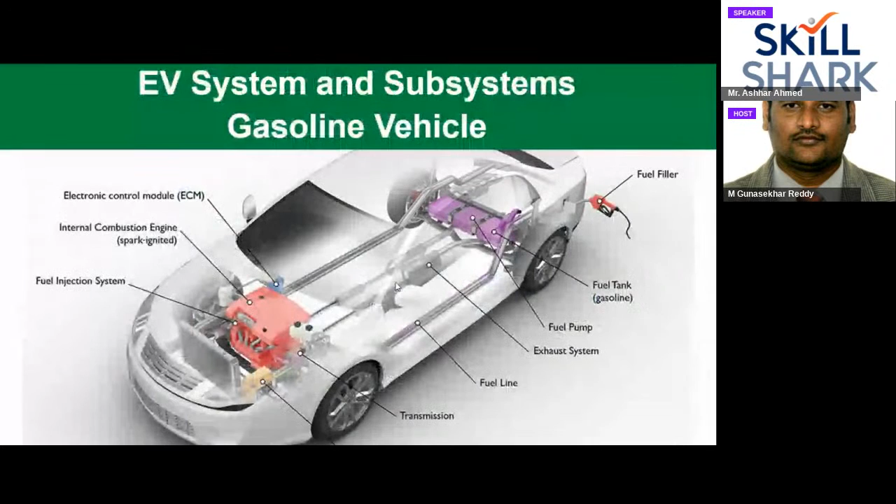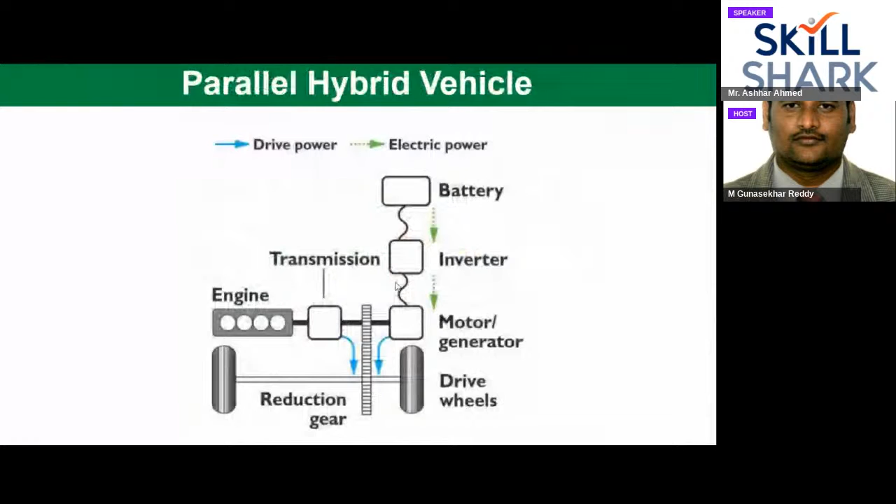Then we saw the need of fostering education and employability. We saw the automotive industry before and with COVID. What are the challenges? What does the Indian automobile industry need for electric vehicles? Transportation system overview we saw, then roadmap, classification, evolution, investments, requirement for the renewable energy sector. Then we saw the need of the EV ecosystem, different types from gasoline to hybrid, plug-in hybrid, electric vehicle, fuel cell vehicle. Then we saw the emissions from different modes, series hybrid, parallel hybrid, hybridization levels,

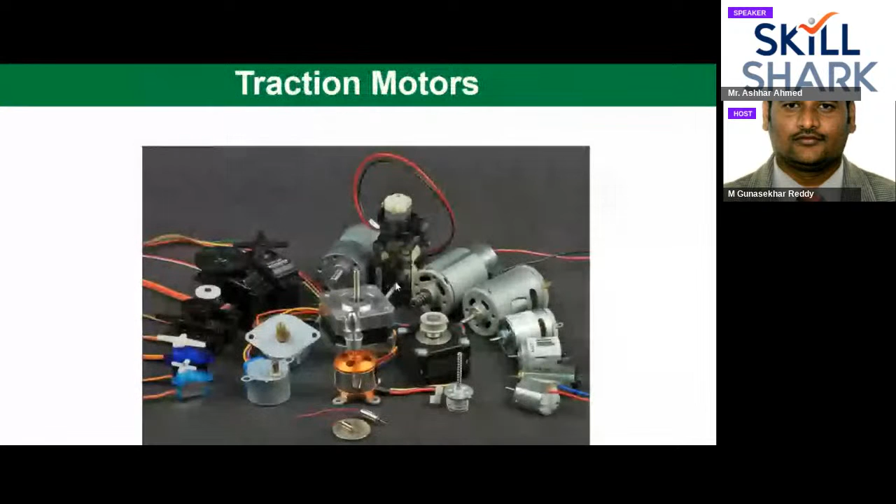EV systems, subsystems, weight distribution classification, comparison of EVs, e-mobility in India, then future of mobility in India, National Electric Mobility Mission Plan, electrification approach, global EV market, Indian EV market, driving factors, different products of the Indian mobility and EV industry. Then we saw the different propositions that will be emerging in coming time. Then we saw motor, battery, controller, the types of motors, and the characteristics of motors. Then we saw a few case studies of different types of motors. Then what else we saw?

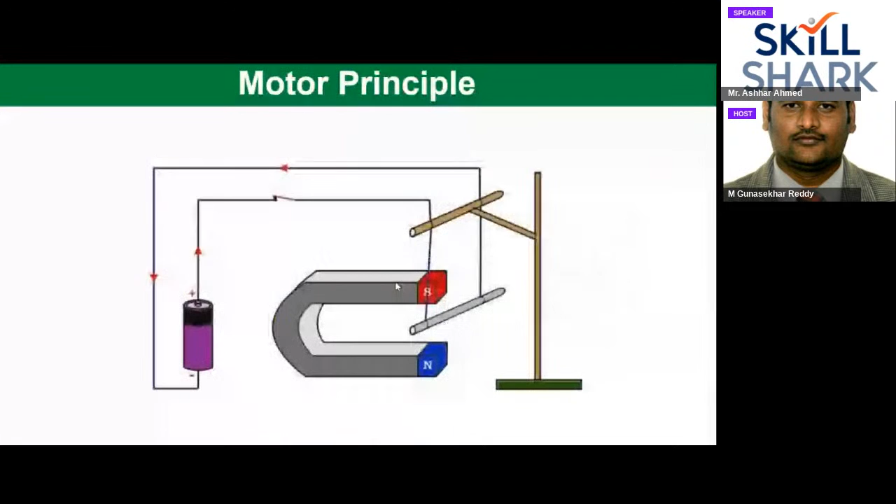We saw the motor principle, how a motor actually functions. Then we saw the different types of motors. So we stopped till this point. So let's try to resume from here. Yesterday we were discussing one part. I hope everyone is clear till now. If you have any doubt or clarification, you can post your query in the chat box. So yesterday we were discussing how a motor can act as a generator.

How a motor can act as a generator. And I told you that in today's session I will show you a video where you can actually understand how a motor can act as a generator. So there are two things that we have to understand. Motor construction and generator construction are similar because both work with the magnetism concept. In a motor there is a stator, there is a rotor, and in a generator also there is an armature.

So in a motor or generator, what we are trying to do is the interaction between the stator and rotor magnetic fields, and because of that interaction, the rotor is moving and we are getting a torque or output. So what is RMF? Rotating magnetic field that is getting created. If the RMF speed is greater than our rotor speed, then the setup will act as a motor.

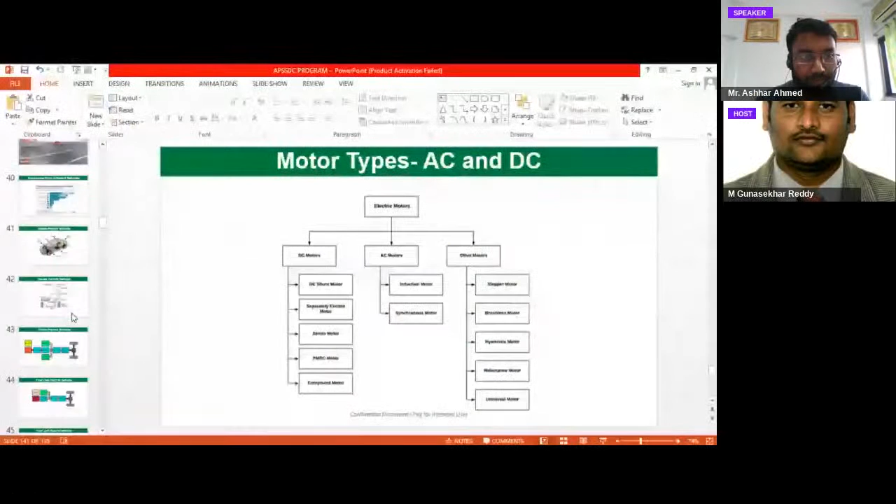It, yes. So here you can understand how the regenerative braking is happening, and how the motor will act as a generator.

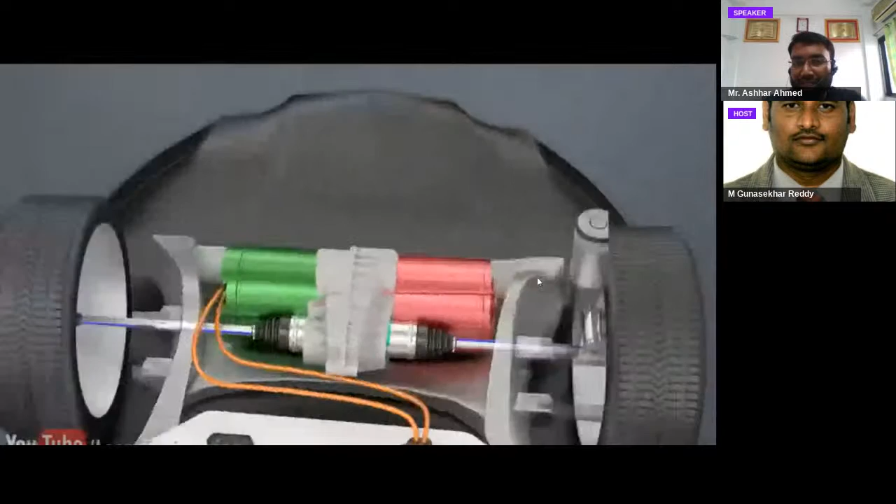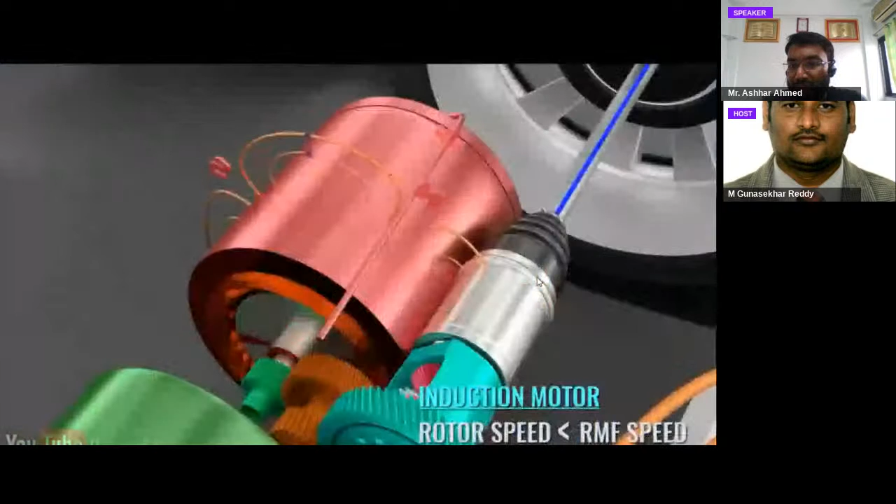How can a motor act as a generator? You see, there are two concepts. One is RMF speed, another is the rotor speed. So the setup will act as a motor if RMF speed is greater than the rotor speed, and it will act as a generator if the rotor speed is greater than the RMF speed. I hope through this video you will be very clear with the concept, right?

All right. So this was about the rotor speed and the RMF speed and how a motor can act as a generator. Right now, let's try to understand the further things that we have to discuss today. Right. So about the types of motors. So when we say a motor or a traction motor that we are going to use for our electric vehicle, we have to actually understand what are the different types of motors.

So hope you are able to see my screen. Yeah. So electric motors are majorly categorized into three types: DC motors, AC motors, and other motors. So in DC motors, there are different types: DC shunt motor, separately excited motor, series motor, PMDC motor, compound motor. These are the different types of DC motors.

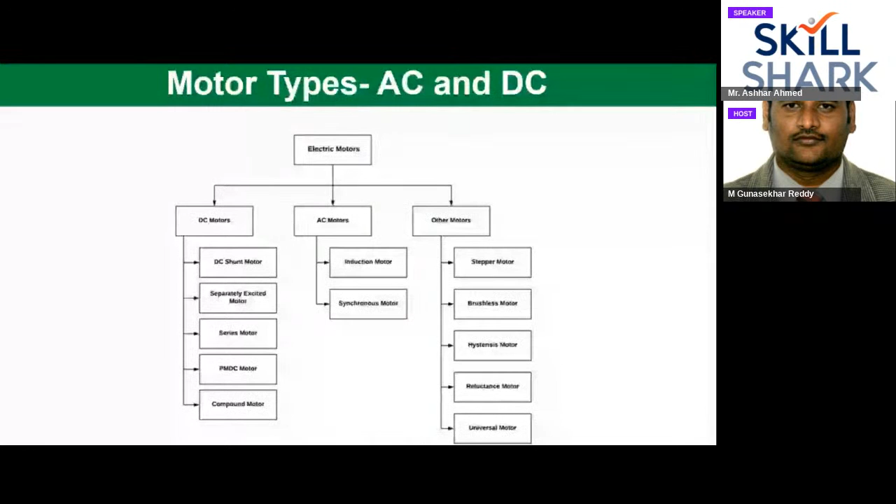Right. So in DC motor, what is the difference between this DC shunt motor, separately excited motor, series motor, compound motor? In these different types of DC motor, the difference between the shunt motor, series motor, compound motor, is the position or configuration of the field and armature. So let's try to see that. Right here you see the field is connected in series. Here it is in a shunt position. Here it is in a compound position. Are you able to understand? I hope you are able to understand.

Yes. So these are the different configurations. Shunt is nothing but parallel. Series is series. Compound is a combination of both series and parallel. When we say that the resistor is shunted, it means the resistor is connected in a parallel configuration. So I hope everyone is aware about series and parallel. In coming slides, when we are discussing about battery, we are actually going to see the difference between connecting the cells in series and connecting the cells in parallel.

All right. So let's try to see specifically about the motors. So these are the different types of DC motors majorly used in our electric vehicles.

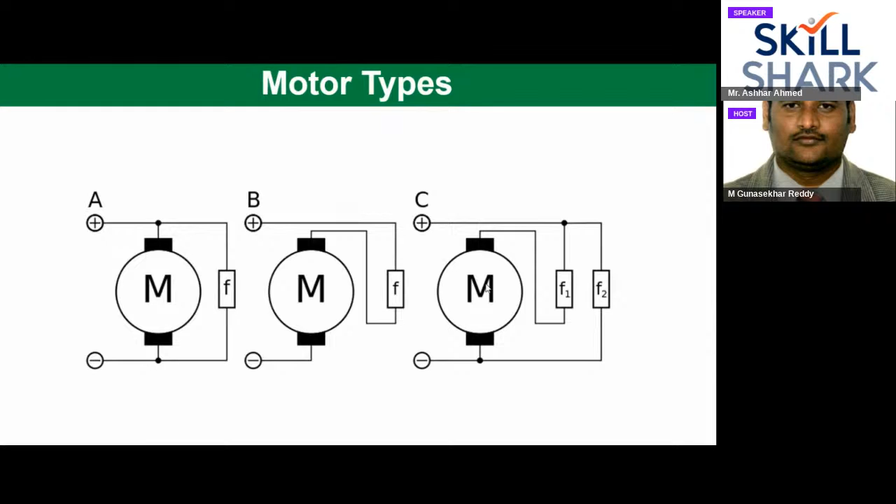And Shankar Narayan is asking what is that F1 F2. So F1 F2 is nothing but field. You see, this is armature and field. We represent the armature, or the rotor, with that M. Are you able to understand? So these are the notations we give for armature, and this F is the field. So here the field we are connecting in series as well as parallel. That is the F1 F2 you are able to see. Yeah, field winding, correct, the field winding.

So now let's try to understand the different types of DC motor majorly used in our electric vehicles. In our electric vehicle, we can see the brush DC motor, the PM DC motor, permanent magnet DC motor, and the brushless DC motor. So can you tell me what is the difference between these types of motors?

So can anyone explain? You can use your mic, or else you can comment in the chat box. You are free to respond. So can you tell me what is the difference you are able to see between the brush DC motor, permanent magnet DC motor, and brushless DC motor?

Yes. All right, so let's try to understand the difference. Right here, in brush DC motor, right, you see the construction wise.

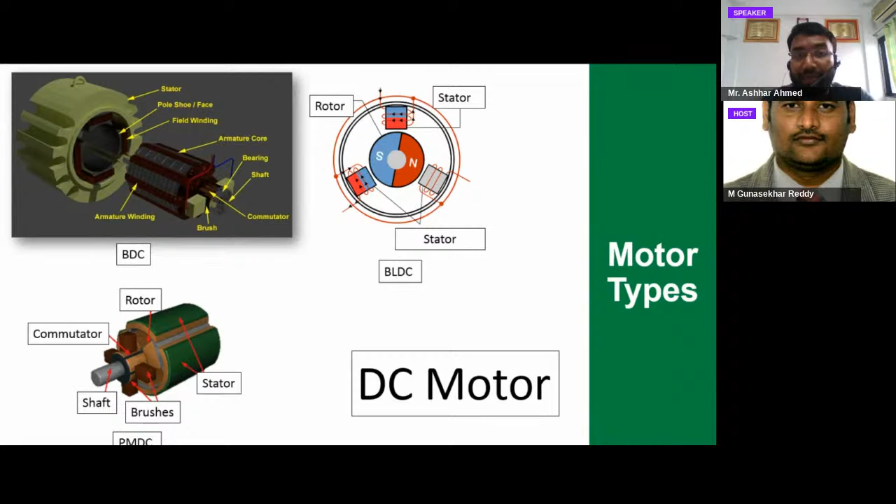Let me tell you. So the difference you are able to see between the brush DC motor and brushless DC motor is: in the brush DC motor, in the image on the screen, the stator is an electromagnet, and the rotor is an electromagnet.

Whereas in the brushless DC motor, the stator is an electromagnet and the rotor is a permanent magnet. Why do we pass electric current through the rotor here?

Why do we pass electric current through this armature winding or rotor here? We pass electric current through this armature winding or rotor to make it an electromagnet, so that it creates the magnetic field. So the whole reason to have the brushes is to flow the current through the armature winding.

But understand, when we replace this armature winding with a permanent magnet itself, you see here the rotor is a permanent magnet. Instead of this armature winding and these brushes, everything, we are replacing that with a permanent magnet. So there is no need of a brush here, no need of passing electric current to the rotor, because the rotor is already a permanent magnet.

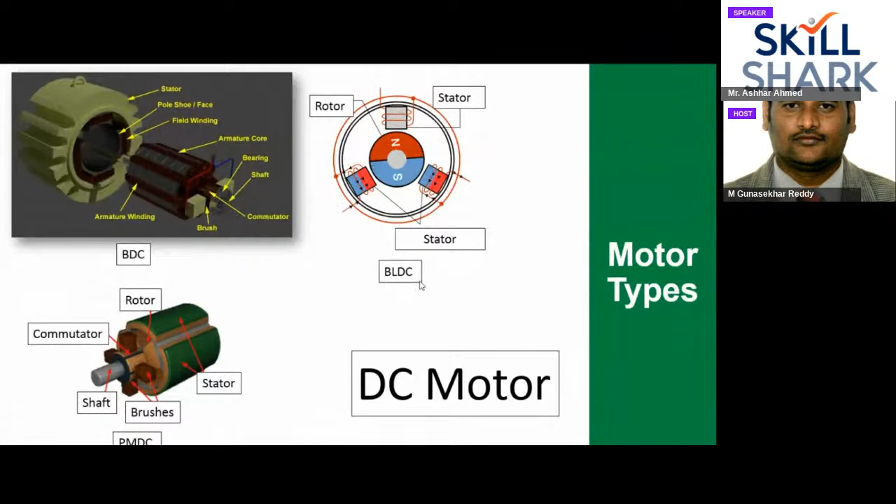So let's move to the next part. These are the different types of DC motors we saw. Now let's try to understand what are the different types of AC motors we can see in electric vehicles. We can see mainly three-phase AC induction motors getting implemented in most electric vehicles.

So the reason why people are switching towards AC motors, or the reason why people prefer AC motors—can you tell me what is the reason why people try to prefer AC motors?

So what happens actually in a DC motor? In an electric vehicle, whether we are using an AC motor or DC motor, our objective is to control speed, to provide the power, to provide the torque, to provide the rpm. So rpm or speed is one of the intentions why we are utilizing these motors.

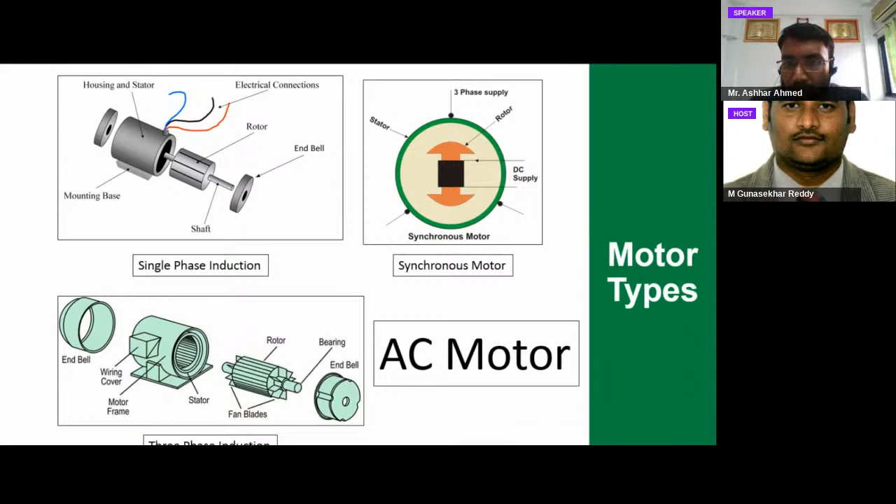Capacitor, does it allow AC or DC? Okay, people are telling that it allows AC. Yes, why does it allow AC only?

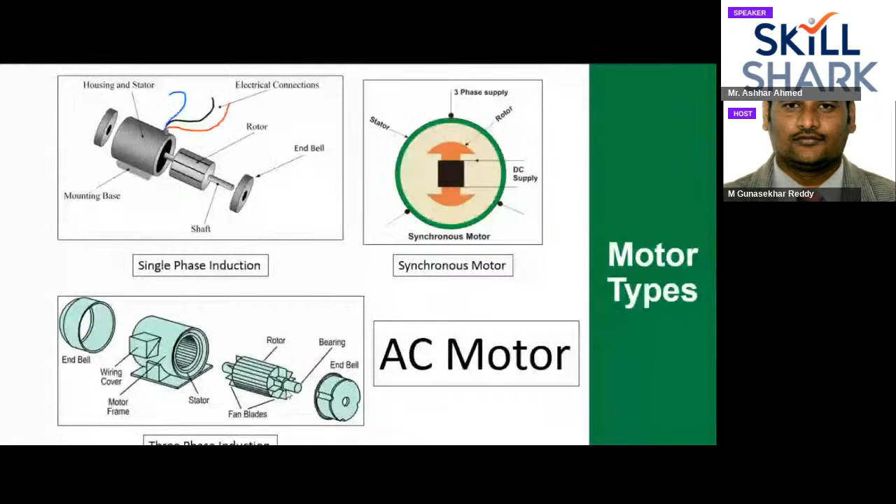I will tell you one story. I asked this question to a few people: tell me whether capacitor allows AC or DC. So he thought for a while and told me, okay, capacitor allows AC. I asked, can you explain with some mathematical explanation, or give an equation, to understand why capacitor allows AC and blocks DC?

So he told me he needed to recall. He said his faculty, in his class, was teaching electrical engineering and gave some explanation like that. So I told him, okay fine, you can think for a while and tell us what the explanation is.

Now the explanation that student gave is, he told me that in DC, the power supply or the flow will be constant. There will not be any variation, any variation of the voltage with time. So it will be constant.

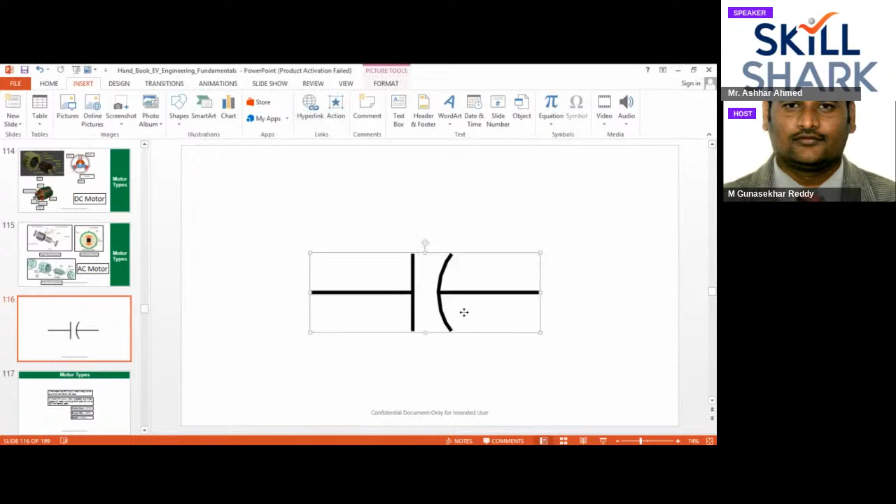So you should not be in the same position saying that capacitor, it allows AC because it can pass through like this. DC cannot pass, right? Because being an engineer, we should actually understand why capacitor, it allows AC and it blocks DC. So everyone is aware about XC. XC is nothing but 1 upon 2 pi FC, right? The capacitive reactance is XC equal to 1 upon 2 pi FC.

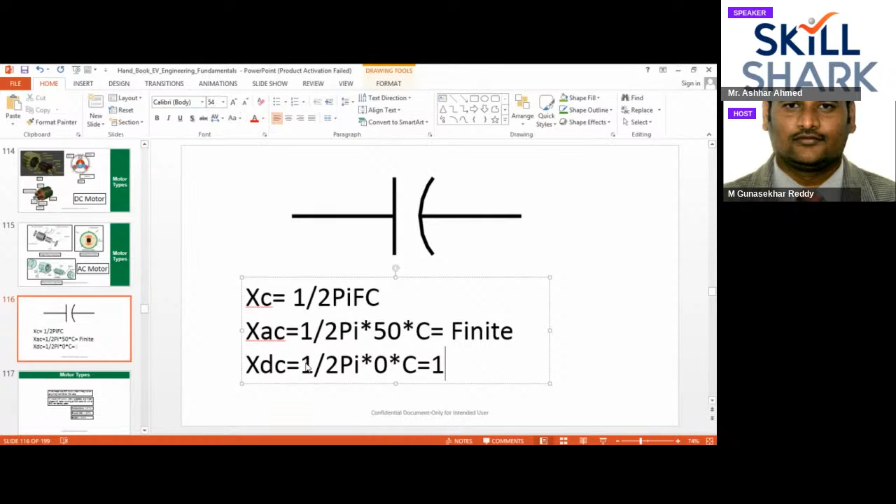And we know that for AC, the frequency is, let's suppose, 50 hertz. So here the frequency will be 50 hertz into C. So the reactance value for AC supply or AC input will be a finite value. Whereas X DC will be 1 upon 2 pi into 0 into C, which is equal to 1 upon 0, which is infinite. Are you able to understand? Yes. So this is a mathematical understanding of why capacitor, it allows AC and it blocks DC.

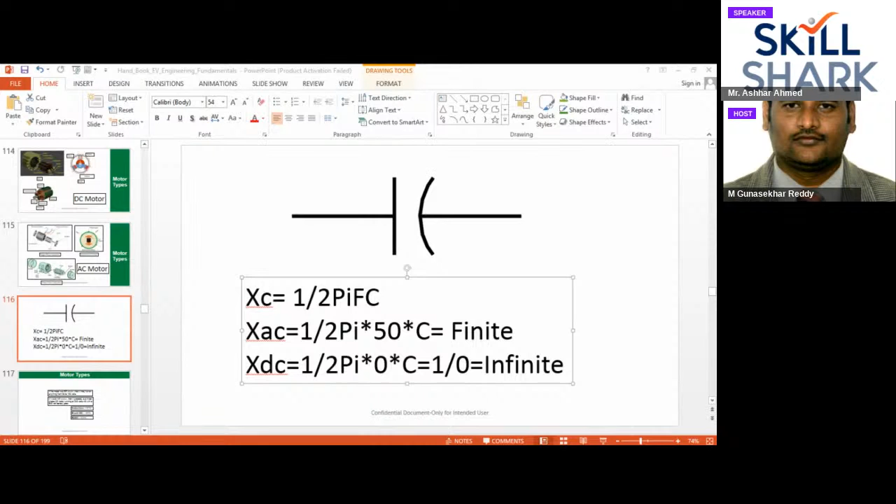When the resistance is infinite, how it will go? It cannot go. It will not go, right? So yeah, that is what I'm trying to communicate. So it is our responsibility to understand things, to learn things, and to apply things also, right? So now we can see in electric cars, in electric vehicles,

both DC motors as well as AC motors are being used. So there is efficiency of these different types of motor. Through induction motor, people are able to extract efficiency up to 91%. For brushed DC motor, they are able to extract efficiency up to 80%. For BLDC motor, up to 93%, right?

And if we are using any DC motor in our electric car, please take a note, I am talking about electric car, we are using any motor between 96 volt to 192 volt. And if we are going to use any AC motor for our electric car, then we are choosing the voltage system between 240 volt to 300 volt, right? So this is about the different types of motors.

Now we are going to start our discussion about selection of our motor. What is the procedure to select a particular motor? What are the calculations involved in it? And what are the things we need to actually consider?

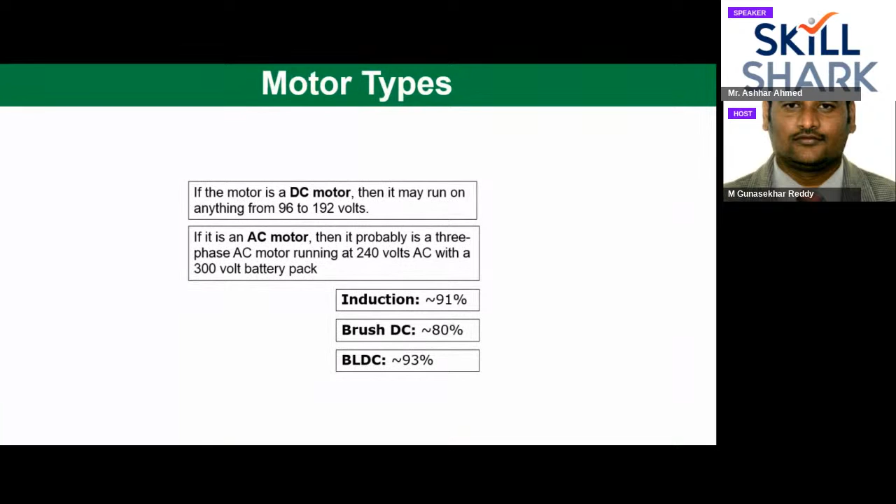And just for confirmation, I'm asking. I hope everyone is clear till now. Any doubt, anything? Please do comment. Please stop me and let me know if you need any clarification. Yes. Now let's try to see the motor selection part. Everyone is clear?

Yeah. Now let's try to understand the motor selection part. So motor selection is very, very important. How are we going to select the motor? For selecting the motor, the first thing that we need to consider is application. Based on the application, we are going to select these 6 parameters. What are they? Motor type, motor power, motor voltage, motor cost, motor size, and motor performance, right?

So how to understand what is the application? Application we have to understand by exploring where we are actually going to use that thing. Let's suppose, take an example of electric bicycle. So I have to use my electric bicycle. For what purpose? I'm going to use my electric bicycle for my personal commute from my office to my home and from my home to office. That is what my application is.

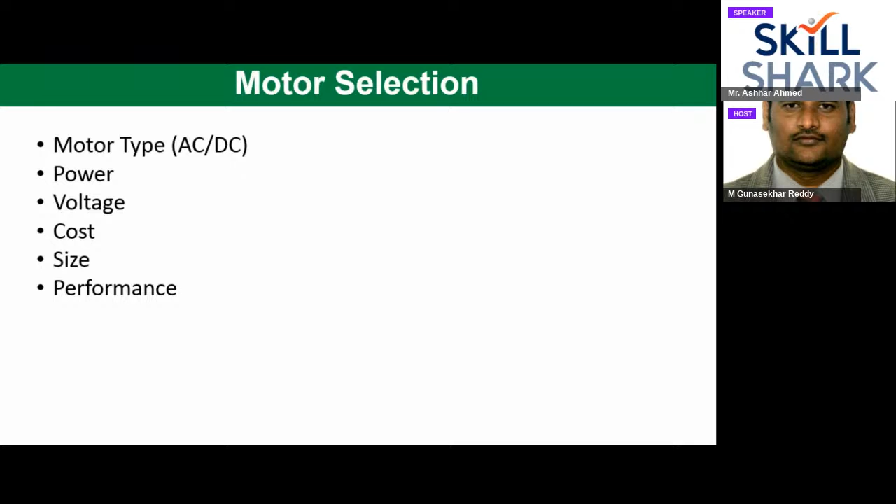So we are going to use this letter or this terminology for mass. Here mass will be the total mass of the vehicle, inclusive of driver, load, chassis, powertrain, other components, all these things. Let's take one example. For an electric bicycle, can you tell me what will be the weight of the bicycle, like frame, motor, controller, battery, everything?

Fifty kg, Chitturi Kumar is telling 50 kg. Okay, you might not have an idea about electric bicycles. Take the example of your Activa. What is the weight of your Activa?

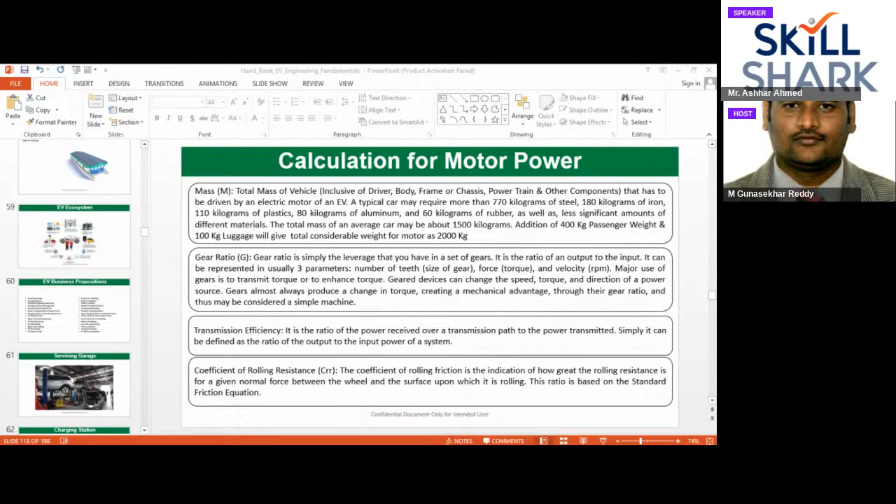I'll... Let's try to understand.

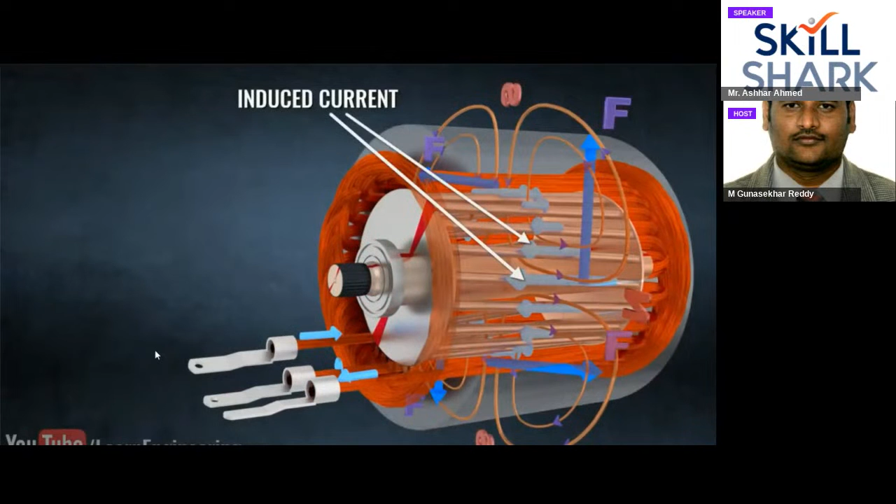Yes, so here you see the stator and rotor construction. The input power that is getting in is creating the rotating magnetic field, RMF. This you are able to see is the induced current. So here rotor speed is less than RMF speed. That is why it is functioning as a motor.

Here in an AC induction motor, the speed is directly proportional to the frequency of the current. More is the frequency, more is the speed.

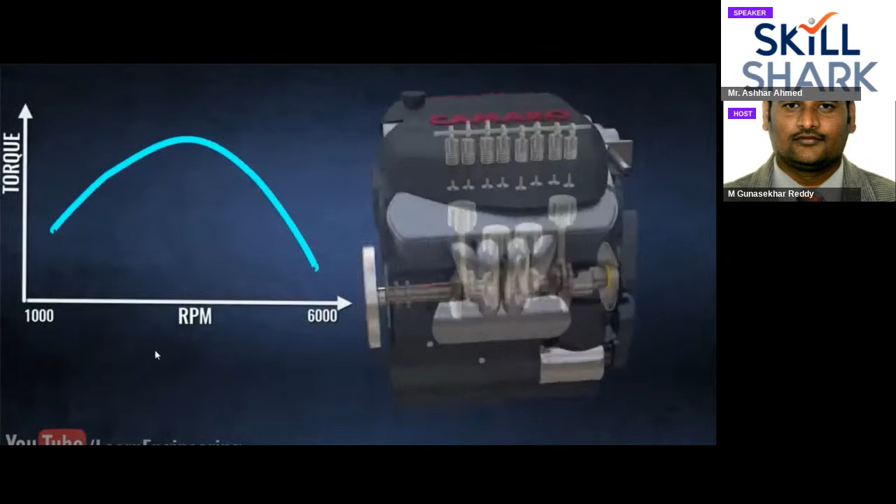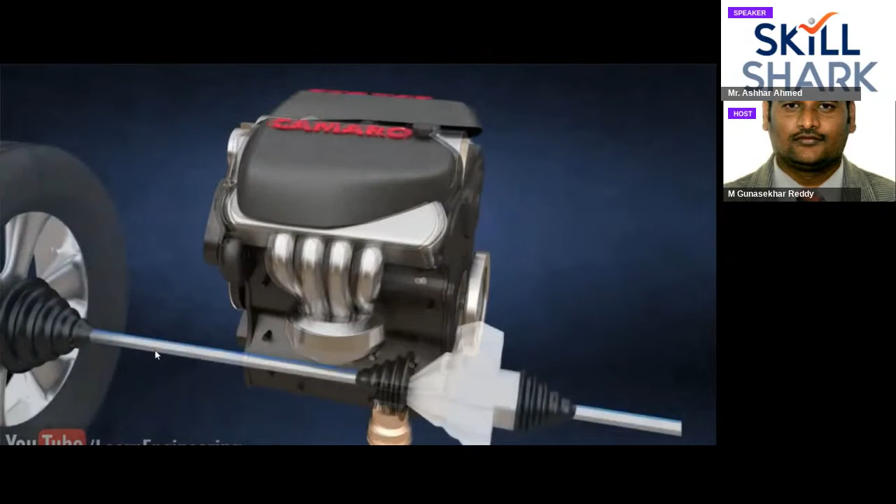Here, with this AC type of motor, we can easily get a huge range of RPM, whereas in an engine we are able to get a very limited range. You see the graph: only up to 6000 RPM with less efficiency, whereas here up to 18,000 RPM.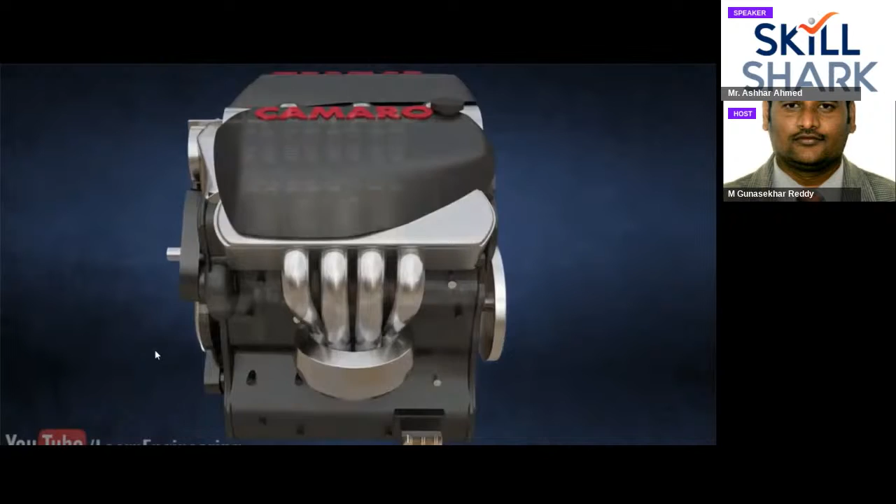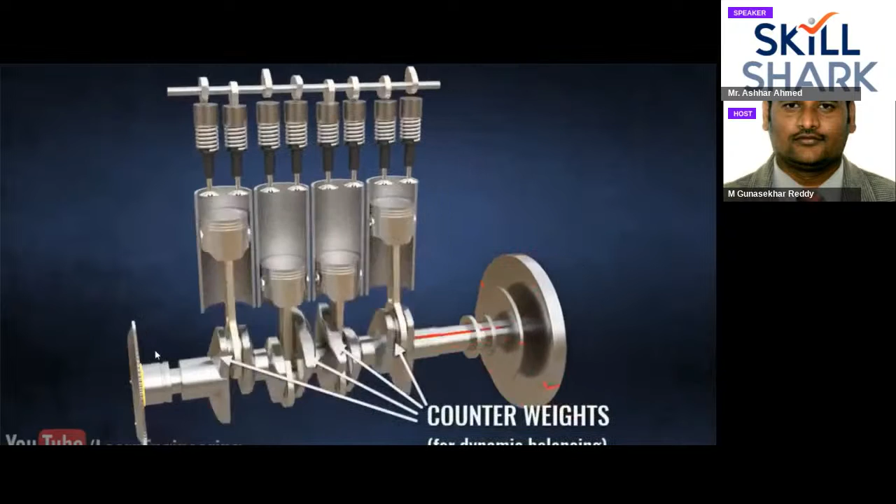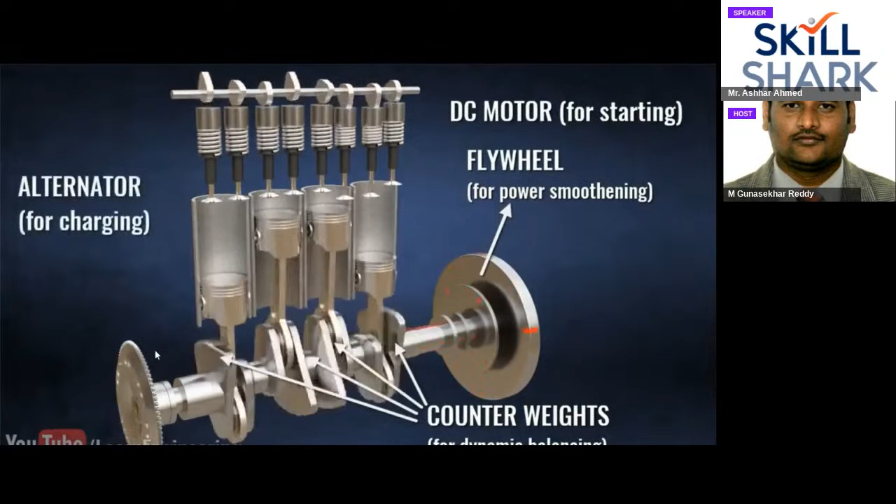Also, in an engine the reciprocating motion has to be transformed into rotational motion. We have to use counterweights, right? We have to use a DC motor for starting. We have to use flywheels, an alternator, so many things. Whereas this AC motor is very simple and sweet.

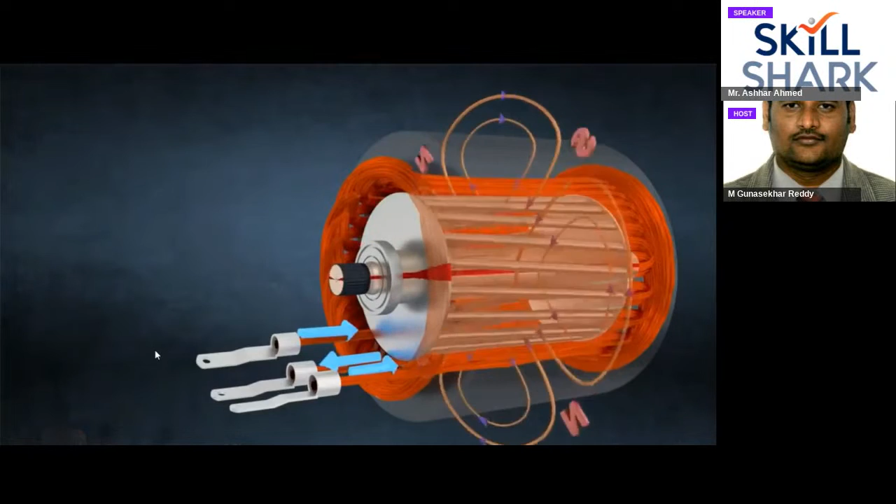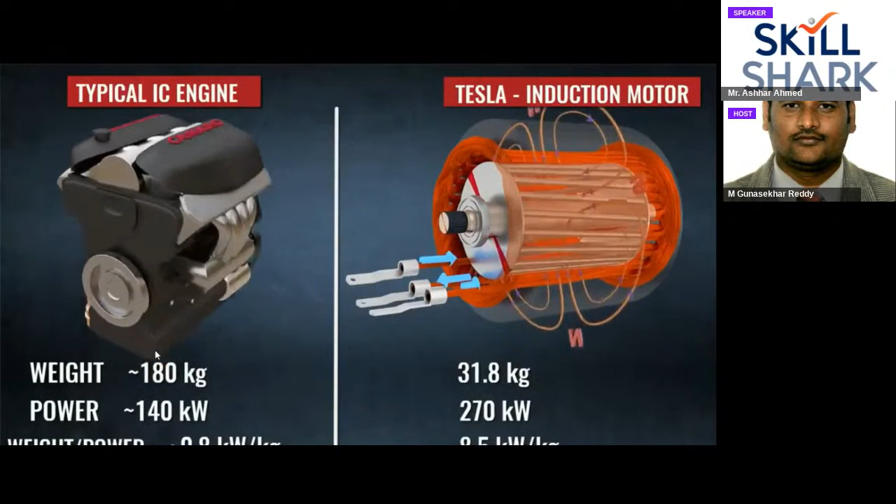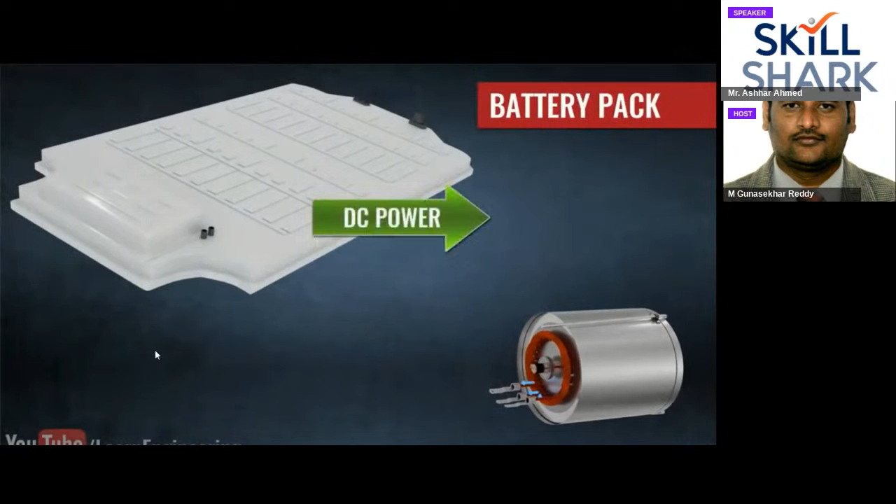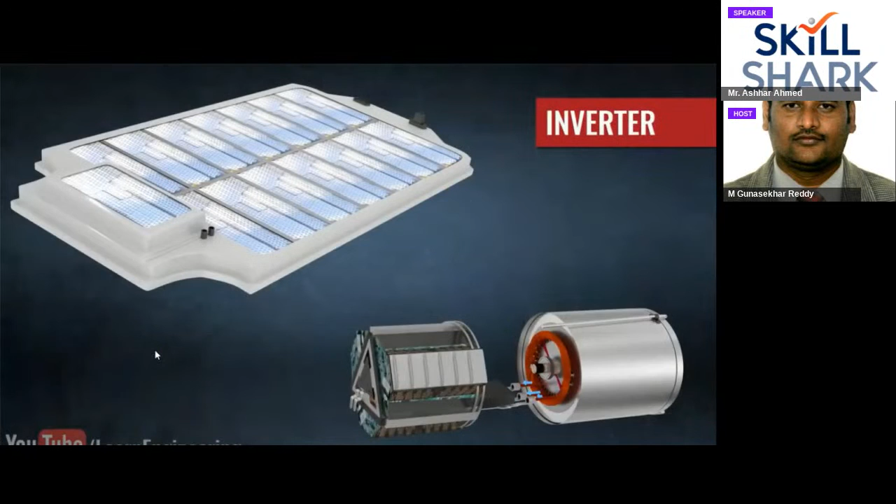And if we compare the induction motor of Tesla, the weight, the power, or the power to weight ratio, we'll understand that this motor is far better. And we'll understand what battery pack it is using. Tesla is using lithium ion batteries with Panasonic cells. They have an alliance or MOU with Panasonic, so they are using Panasonic cells, right?

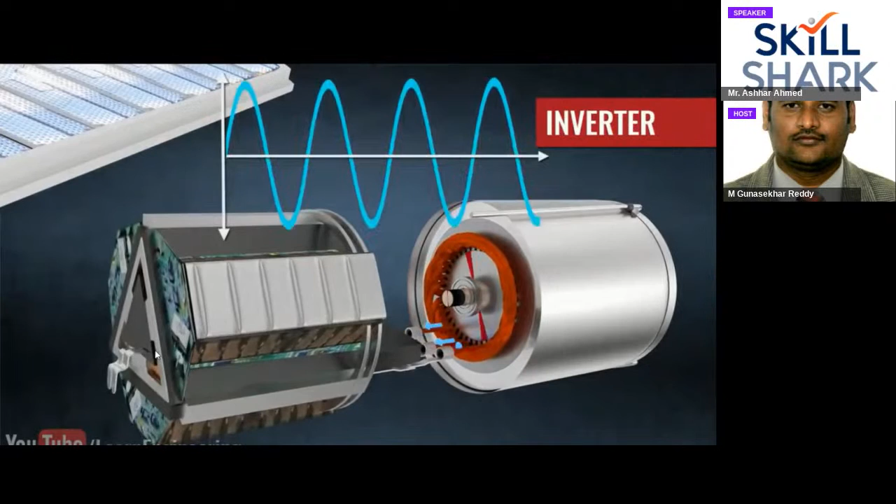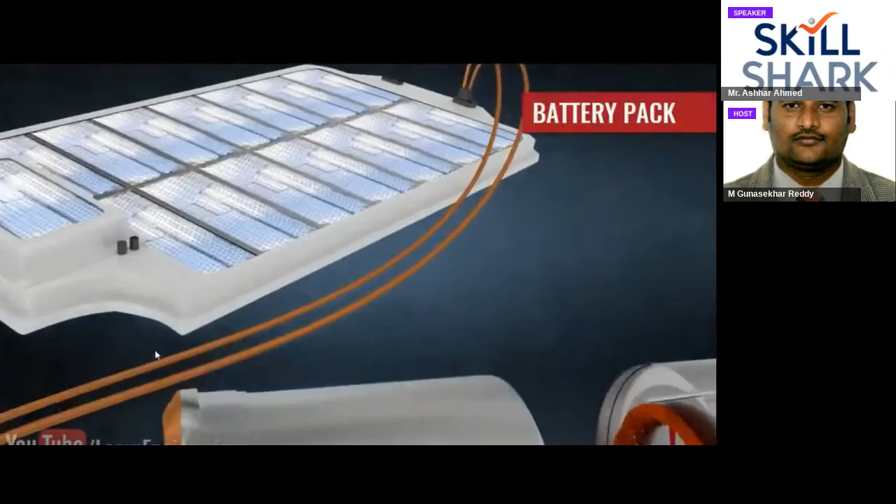So this motor will be connected through the inverter, because the battery is DC. That is why we are using an inverter. You see, in the battery there are different single cells connected in series or parallel as per the configuration to form the battery pack, and in between there is coolant flowing in and out for thermal management. Around 7,000 cells are there in this Tesla battery.

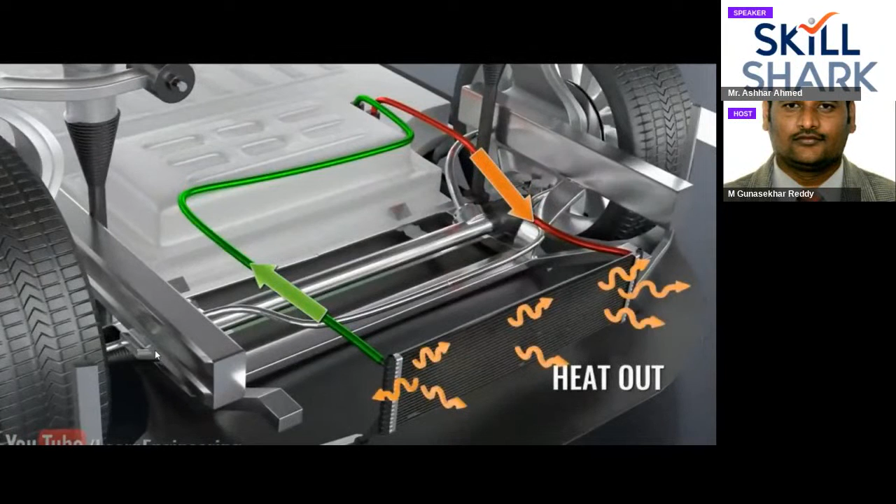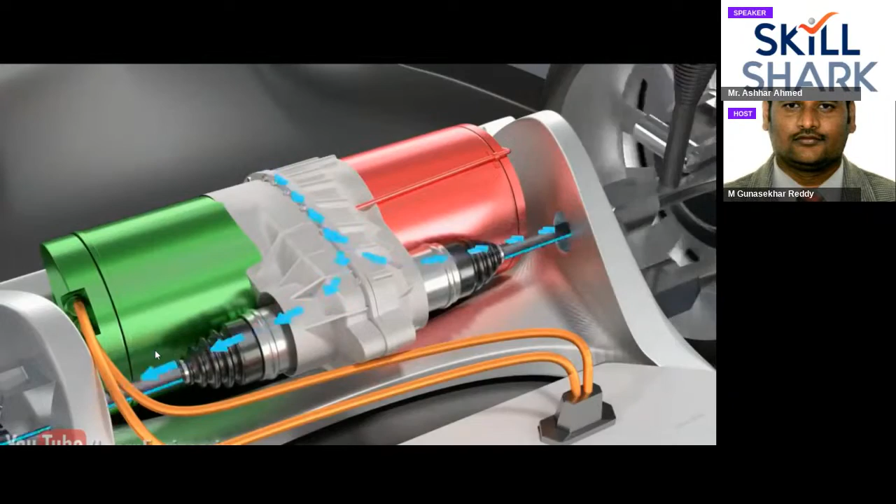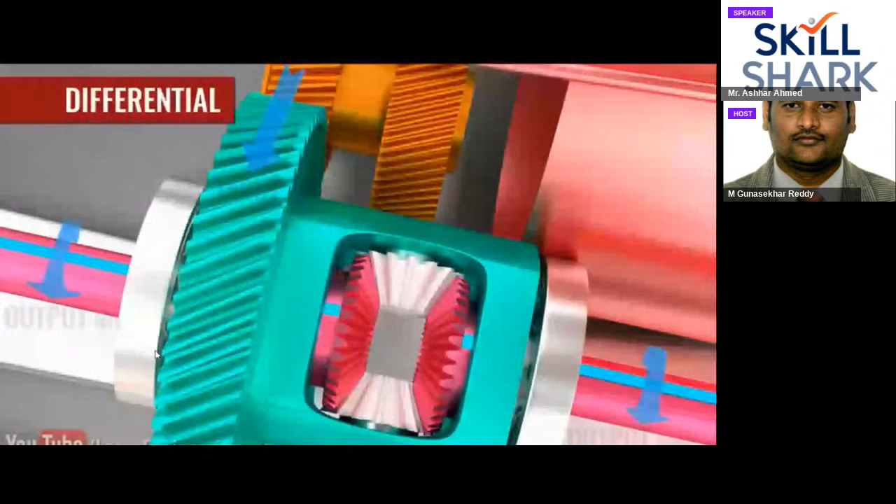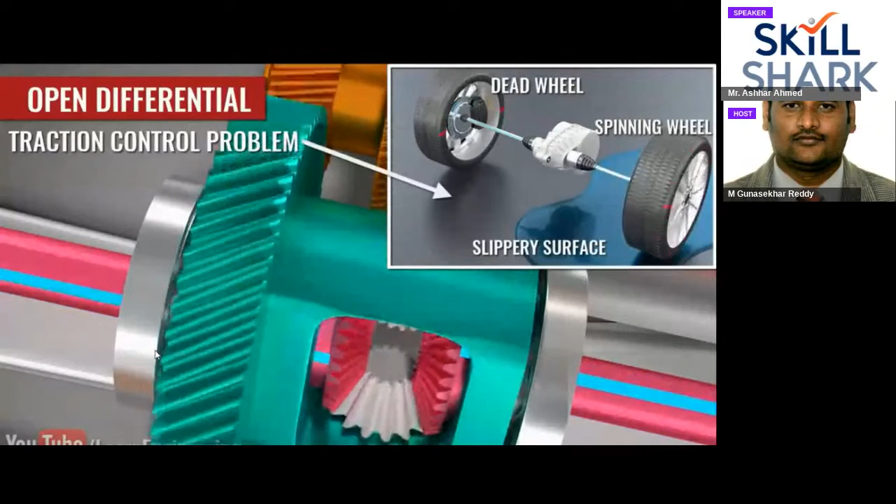So this heat is going out. You see the ground clearance. You see the CG height. Structural support is given. So here is the transmission that is happening. See the motor output, the transmission output. Differential. Right? You see how the power is getting transmitted and how this differential is acting here.

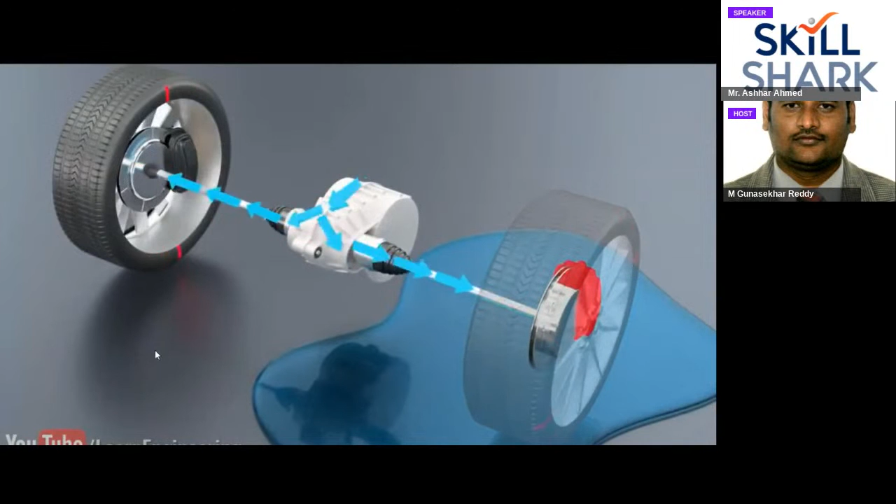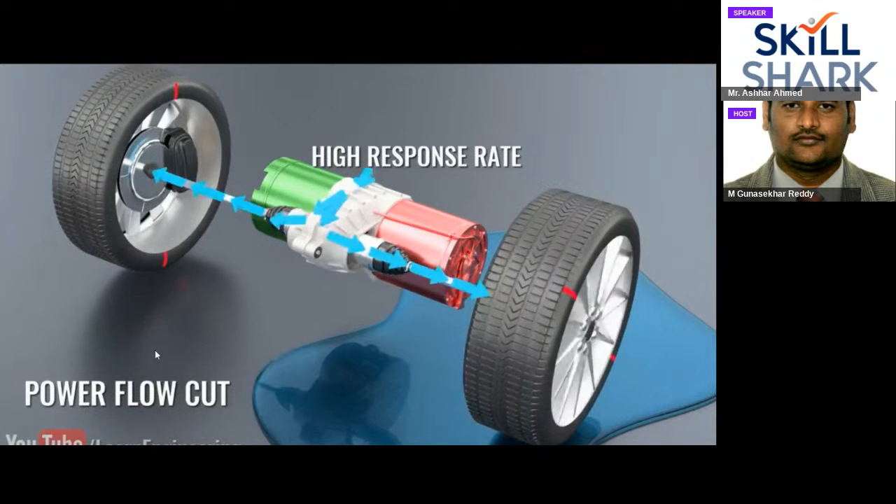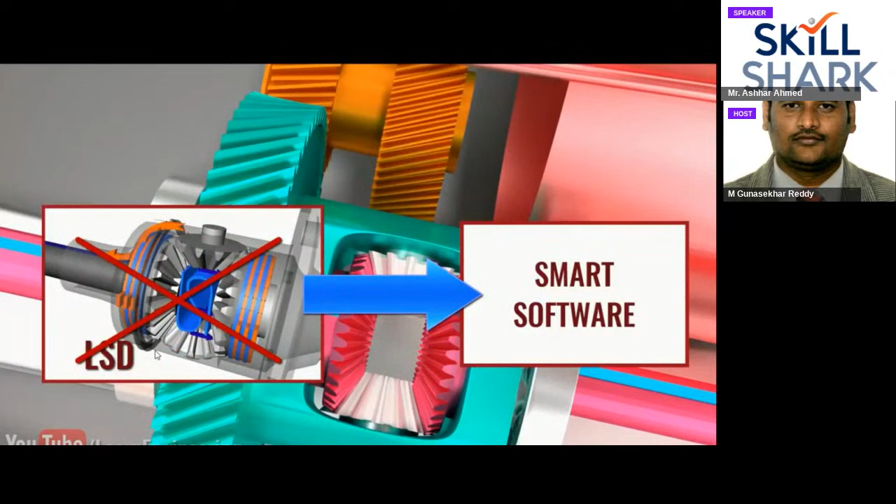So an ICE engine has low response to the fuel cut, whereas here, as the cut happens, the motor will immediately stop the flow of power. A high response rate is there. Here, differential-wise, the control is very simple in an electric vehicle. Only one pedal, one brake. Regenerative braking is also happening here.

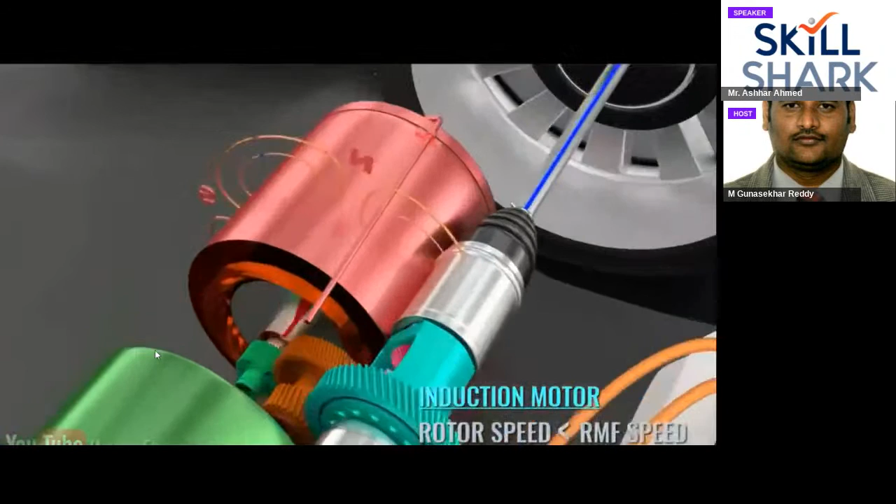The kinetic energy of the car is getting converted into electricity during regenerative braking. This is happening because the motor will act as a generator. When RMF speed is greater than rotor speed, it acts as an induction motor, and when the rotor speed is greater than RMF speed, it will act as an induction generator. And this is the inverter, so the generated electricity is fed there.

Accelerator pedal and brake. That's it. So this is very simple, the kind of thing we can see in an electric vehicle. And here you see there is a huge crumple zone, a huge crush zone, right? So this is about the power transmission and how the electric vehicle is actually transmitting the power. I hope this video has made many things clear.

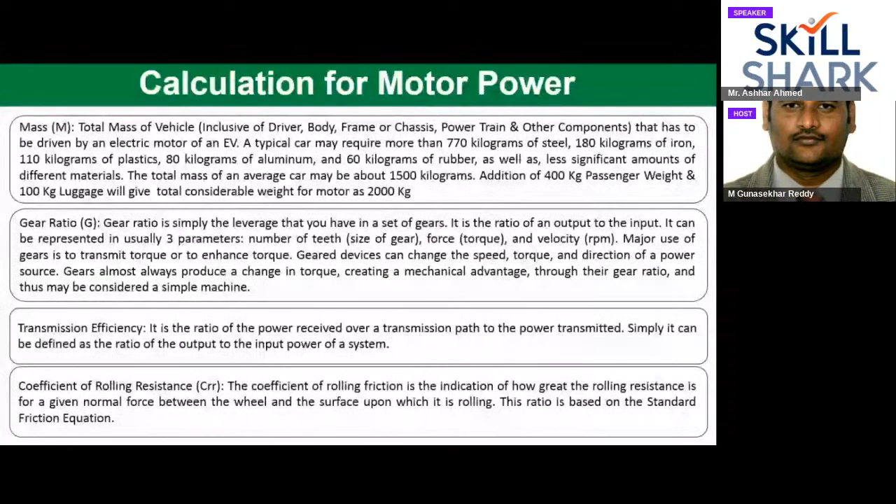Okay, the next thing is vehicle frontal area, which is nothing but the frontal area of the vehicle. Suppose the car is there and the air is coming, right? The air drag is hitting the frontal area. So for considering the aerodynamic drag force, we have to consider the frontal area of the vehicle. For a rickshaw, it will be that kind of frontal area. Let me show you.

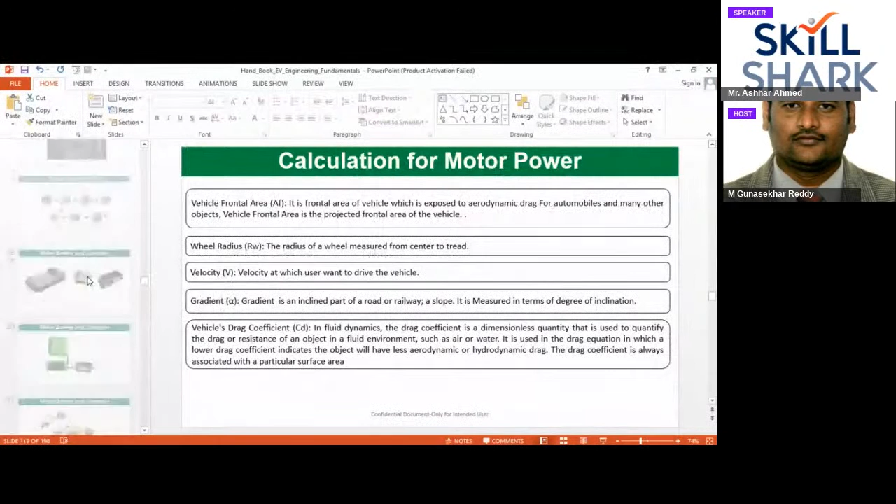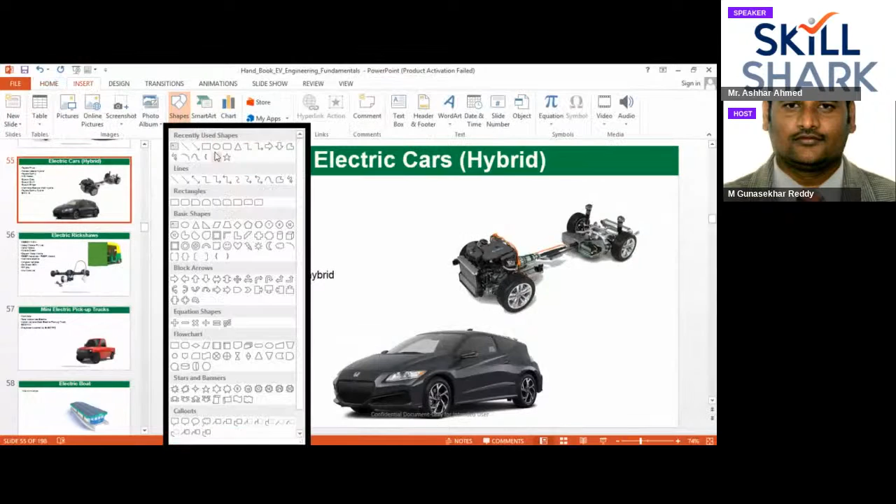For an auto rickshaw, this is the frontal area. For a car, this is the frontal area, rectangular shape. For this, this is the frontal area. Are you able to understand? Yes.

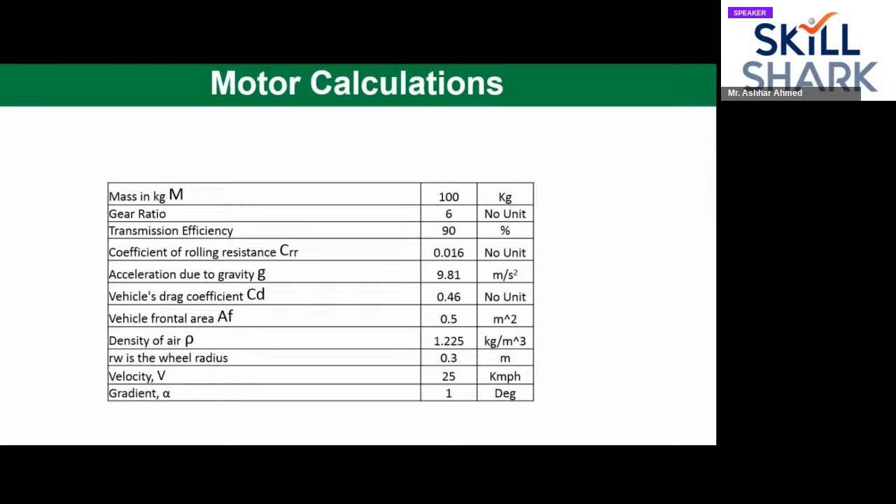Vehicle's drag coefficient is 0.46. Vehicle frontal area, since it is an electric bicycle, will not be more than 0.5 meter square. Density of air is around 1.225 kg per meter cube, that is constant. Vehicle wheel radius for our scooter, our Activa, will be around 0.25 meter. For our bicycle, it will be around 0.3 meter, so the total diameter will be 0.6 meter. Velocity we are going to consider is 25 kilometer per hour.

Gradient, let's try to consider 1 degree. It is up to us whatever we can consider. For bicycle, majorly we consider 2 degree, 3 degree for calculation. For a car or something like that, we consider 7, 8, maximum 10 degree for consideration for doing the calculation. For car also I've seen considering 7 degree for gradient.

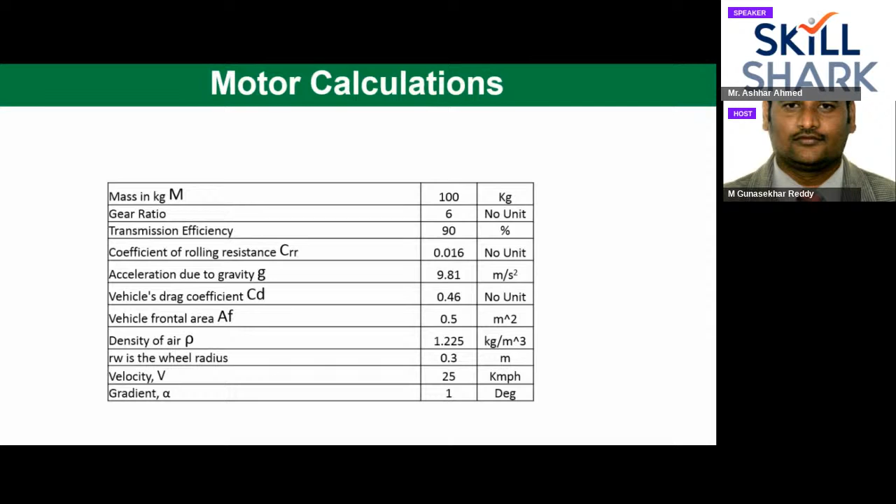So here these are the parameters that we have decided for electric bicycle. The power that we will be getting through the calculation will be the power required to run a bicycle at a speed of 25 kilometer per hour, standing in the middle of an inclination of 1 degree, having a weight of 100 kg. With these values we are going to do the calculation.

So the first thing we are going to find is the rolling resistance. Please find the rolling resistance force: CRR into M into G, and tell me what value you are getting.

Yes, so 15 point something Newton, right? That value of force, if you multiply it with velocity, we will be getting the power in kilowatt. Please do the calculation and tell me what value of power you are getting. Yes, 109 watt, 0.109 kilowatt. Correct? Yes, so this is the rolling resistance power.

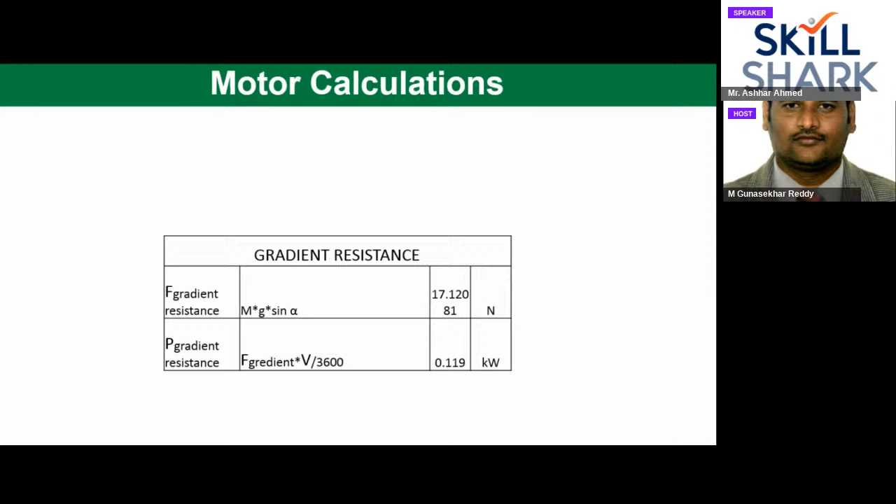Yes, so this is the gradient power you will be getting. Now the next thing you have to calculate is the aerodynamic drag. Please do that quickly. Thank you, Shankar Narayana, for your prompt response.

Yes, what value are you getting? So this will be your drag force. Convert that into power.

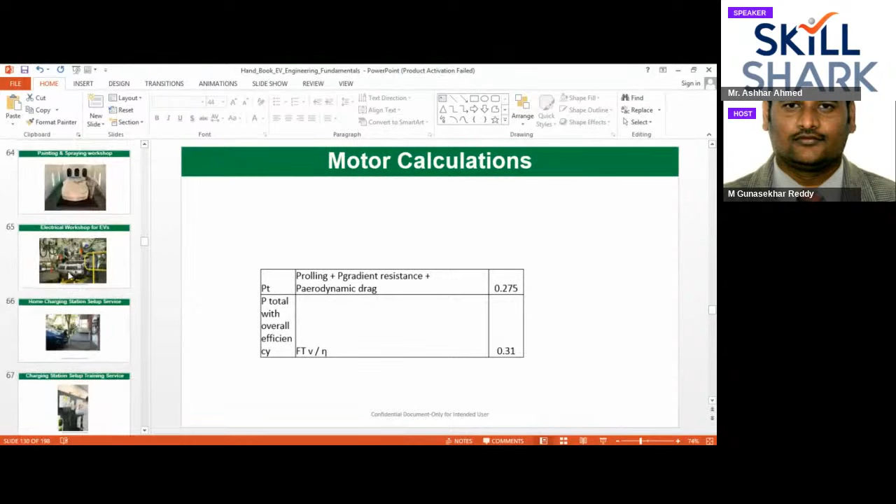Accordingly we can select. I hope you remember we saw this yesterday when exploring the different motors, that motors have two types of powers: nominal power and peak power. The nominal power we are getting here for these motors is around 250 watt, and peak we can get up to 300-350. So this 250 watt BLDC motor is suitable for our electric bicycle.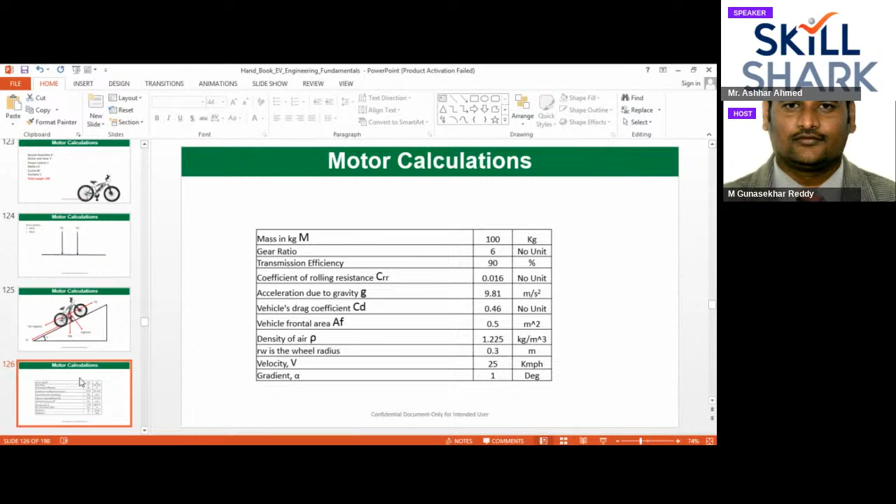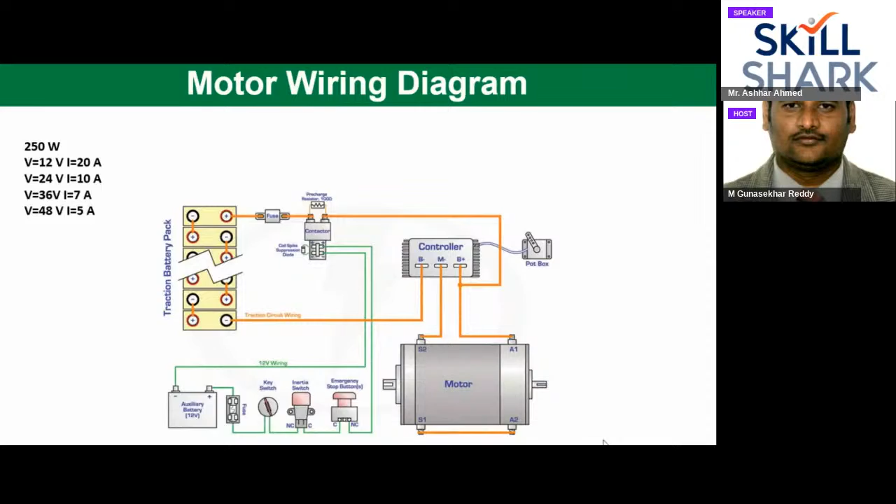So tomorrow when we start, we are going to see the other parameters also. Today what we have done is we found the mass, and from that the rolling resistance, gradient resistance, and aerodynamic drag, and added these values. Tomorrow we are going to see about the motor RPM, motor torque and its calculation, the voltage of the motor, wiring diagram, MATLAB, and many other important things. Let's connect again tomorrow.

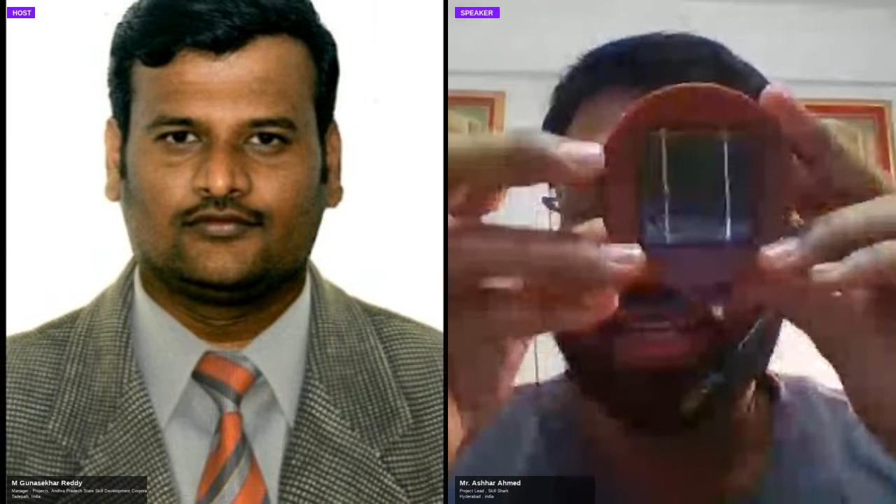See, solar diya - we made this solar diya during this pandemic time and during this Deepavali. So it works on solar energy. Like that, many innovative concepts can be worked on and executed. You can definitely explore these kinds of innovations and innovative ideas.